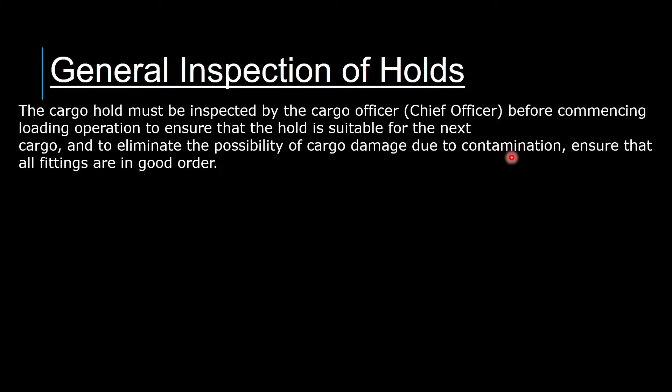The cargo hold must be inspected by the cargo officer, that is the chief officer, before commencing the cargo loading to ensure that the hold is suitable for the next cargo and to eliminate the possibility of cargo damage due to contamination, and also to ensure that all the fittings are in good order.

The requirement of the hold inspection after preparation of the cargo holds by cleaning, sweeping previous cargoes and de-rusting of holds before loading break bulk or dry bulk cargo is aimed at preventing damage, contamination or infestation of the cargo to be loaded. And it also prevents claims of cargo losses due to contamination or infestation.

The hold inspection is also carried out for the following reasons: it prevents delay of the ship and following on and off hire disputes, brings awareness to the ship's cargo officer and the crew of the consequences of the situations, and also safeguards the reputation of the shipping company.

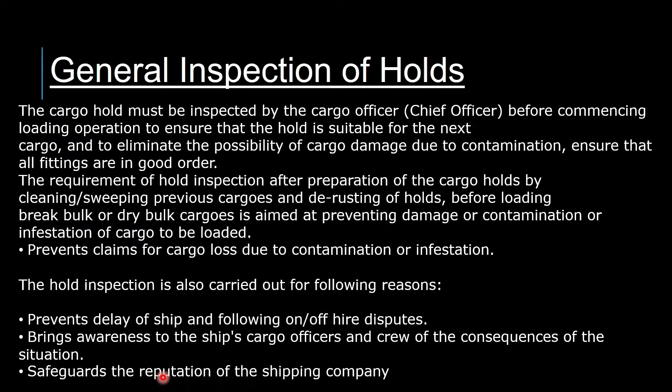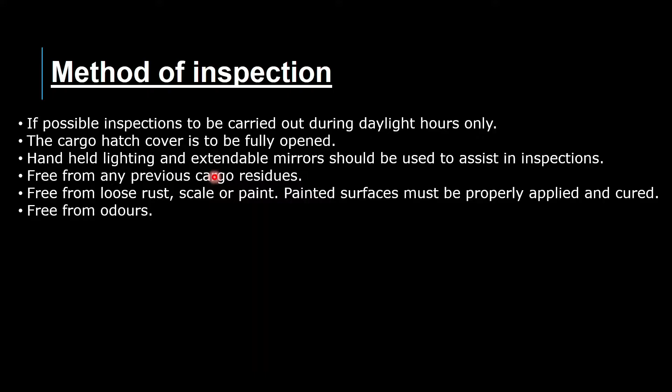Now let's see the method of the inspection. If possible, inspection is to be carried out during daylight hours only. The cargo hatch cover is to be fully opened. Handheld lighting and extendable mirrors should be used to assist in inspection. Free from any previous cargoes. Free from loose rust, scale or paint; painted surfaces must be properly applied and cured.

Free from any odors. Particular emphasis on previous cargo residues on overhead beams, hatch-end beams, hatch joints and hinges, frame brackets, pipe brackets, ladder ways, manhole covers, etc. In all ways in a suitable condition, fit and safe to receive and preserve the intended cargo.

It is recommended that wherever practicable, chalk should be used to mark the sides and ends of the holds after a section has been inspected to ensure that no part of the superstructure is missed with the movement of the man lift up and down or sideways for cleaning purposes.

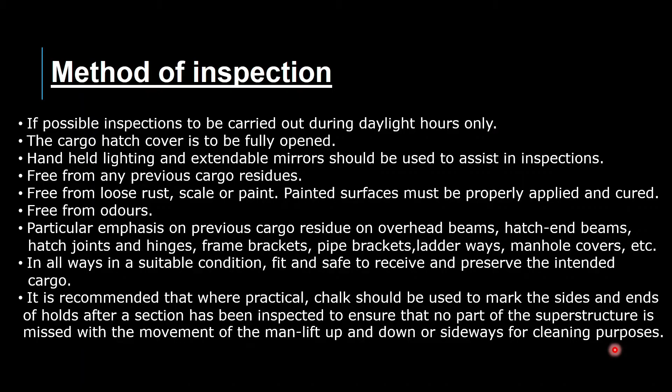Now let's see what items are to be inspected. General cleanliness, no rust or loose rust should be there. Spar ceiling, tween deck draining holes, bilge system, sounding pipes, bilge and double bottom tanks, air vent pipes, electric cables, lighting and connections, general condition of side shells, bulkheads, frames and beams, double bottom tank manholes, ventilation ducts, fire detection

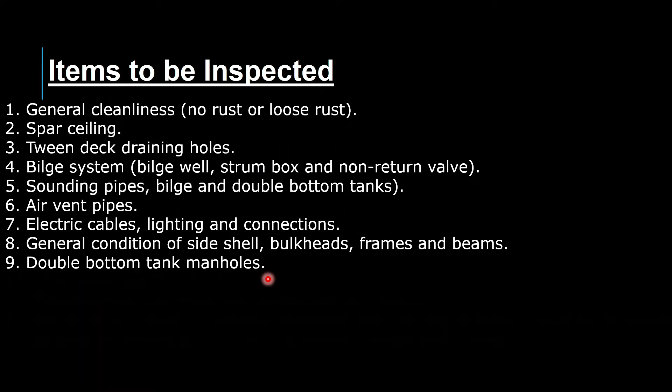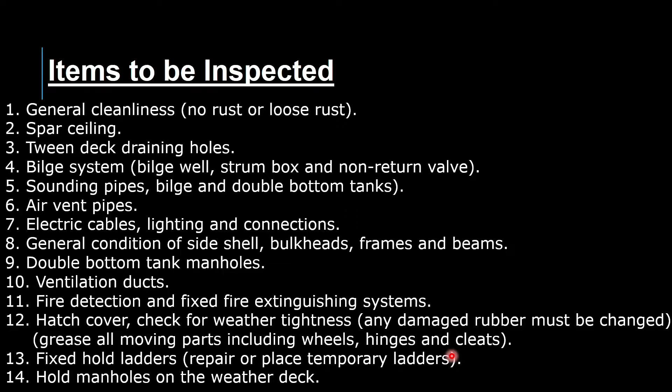and fixed fire extinguishing system, hatch cover, check for weather tightness, any damaged rubber should be changed, grease all the moving parts including wheels, hinges and cleats. Fixed hold ladders, repair or place temporary ladders, and hold manholes on the weather deck.

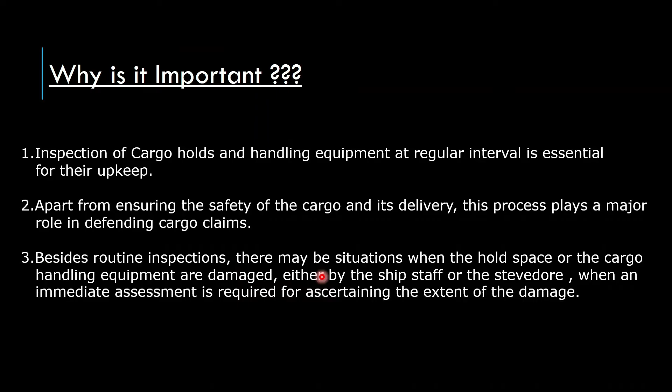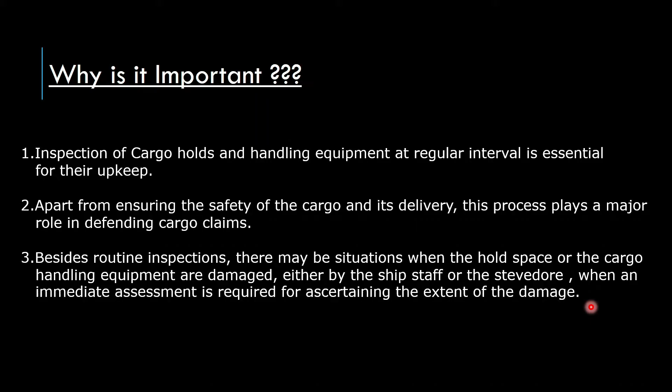Now let's see why it is important. Inspection of cargo holds and handling equipment at regular intervals is essential for their upkeep. Apart from ensuring the safety of the cargo and its delivery, this process plays a major role in defending cargo claims also. Besides routine inspection, there may be a situation when the cargo hold or the cargo handling equipment are damaged either by the ship staff or the stevedores, when an immediate assessment is required for ascertaining the extent of the damage.

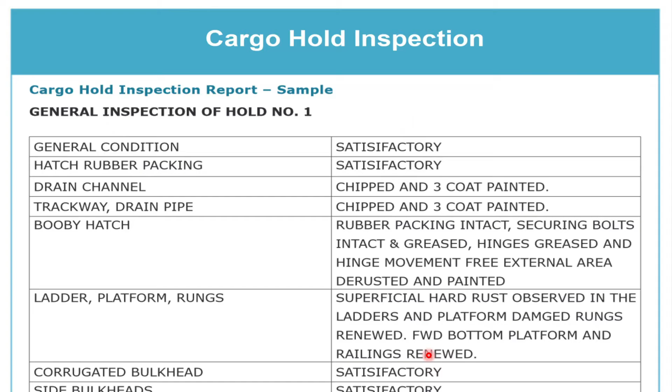So after all these efforts of the chief officer and the crew to prepare the cargo hold, a cargo hold inspection report is made that is to be signed by the chief officer and supervised by the master. So this is a sample of a cargo hold inspection report. These are the checks and these are the remarks to be given by the chief officer after the inspection. You can pause the video and have a look. And after the report is made, a signature is to be given with the seal of the ship.

So now let's see another reason for cargo hold inspection. Assume that there is some damage caused by the stevedores to the cargo hold or to the cargo equipment. So a stevedore damage report is to be made by the chief officer.

So with this guys, we are done with the general cargo hold inspection.